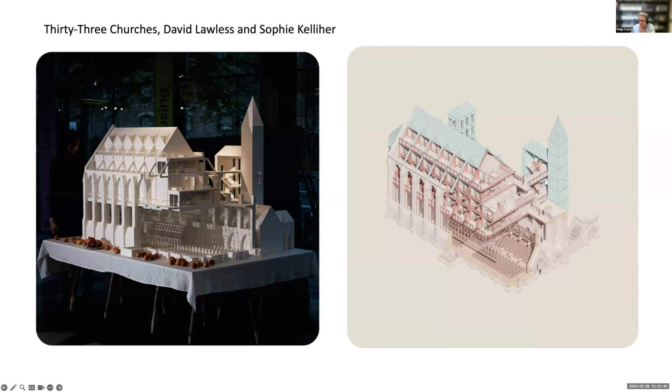And just very quickly, I'm literally scooting through these. This is for people in the audience who didn't get to see the show. 33 Churches by David Lawless and Sophie Kelliher. The name comes from the 33 churches identified in the Archdiocese of Dublin submission to the draft Dublin City Council Development Plan 2022-2028. Their installation really focused on these churches, identifying their potential for rezoning for future residential use, and it was a really provocative, engaging presentation.

Building Society, by Tom Cookson and Sarah Carroll, is very much based around the idea of the unused regional branches, 103 or so regional branches that shut down, and these could, with some physical altering of the space, be turned into places where we could in fact think about them as opportunities for residential use.

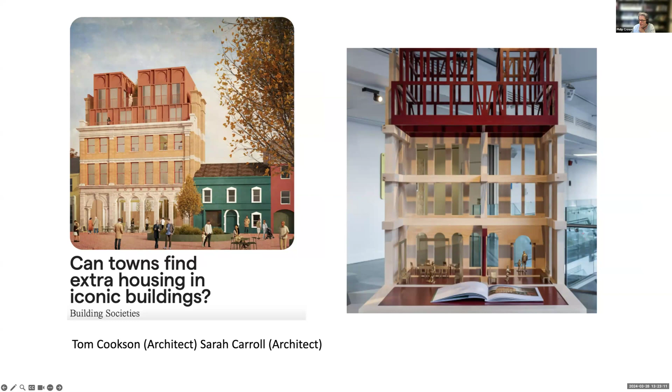But it was very much about delivery, affordability, and placemaking. And their installation was this one-to-one construction. They used, I suppose, the actual one-to-one physical space of the residential space and incorporated that into their exhibition. And they collaborated with Fast House Construction and Common Ground Community-led Designing, Lagan Homes, etc. And they were showing that this is really possible to work in this way.

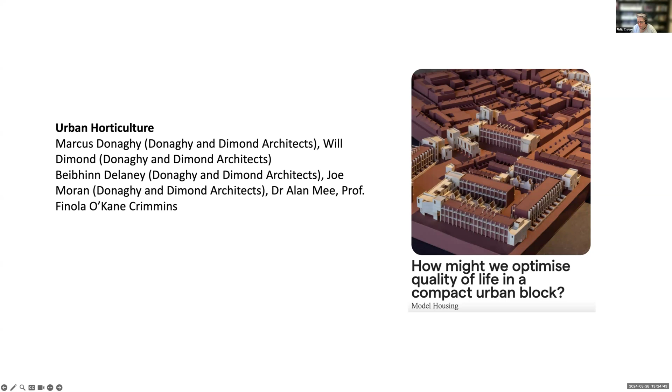The model housing that a team from UCD pulled together, Elith, Marcus and Will and Beibhinn and Joe and Alan and Finola all came together, and they focused this very much on the Liberties, but this actually could be scaled. This actually is the feel, or the sort of thought process and the objectives behind this project, which could easily be applied in any urban setting, either in a town or suburban city edge, and they demonstrate how new opportunities may be found for habitation and rich living environments within the urban grain of Irish towns and cities. And it's just a great project and a great resource for people who are thinking this way.

And then you have what McCullough Mulvin did. I mean, they gave us a hundred ideas, which was wonderful. And in a sense, a lot of the conversations we had around these spaces were with people who work in policy, with people who work in the Department of Housing, and by presenting something as these small bite-size changes, and these ideas, it makes it possible to believe that these can happen. And this particular piece was a never-ending conversation starter and sort of mindset changer, because of the way McCullough Mulvin achieved the subject matter and the presentation.

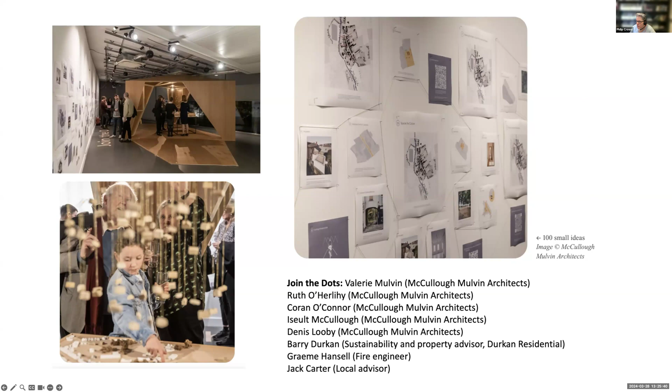And then, Start Spreading the Mews. Stephen, you're very familiar with this project. Again, this was a wonderful installation, really looking at unlocking the potential of suburban laneways, but in a way that was streamlining the process, creating new residential units. And it was just a really, really great project in collaboration between you and Stephen Foley. People still talk about it today, actually, even when I'm in studio here in UCD.

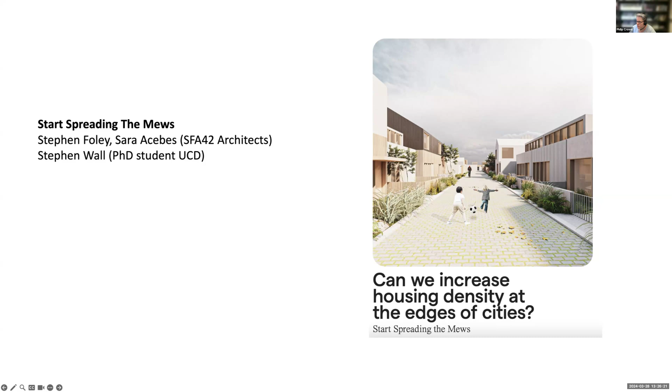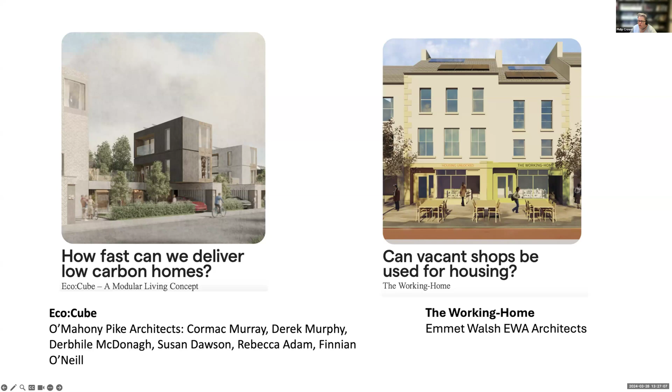And then I'm not going to talk about these because the guys are up next to talk about these, but I'll just move swiftly on again, looking at new ways of thinking about modular living, with the OMP piece, and alternative housing models, looking at issues of density and supply, in that presentation of how fast can we deliver low carbon homes. Even that question is quite provocative. All these questions, can vacant shops be used for housing, what Emmet did? People go, no, you live above the shop, don't you? Why would you want to live in the shop? These were the conversation starters that I heard as I walked through the Science Gallery.

And then, you can see from the amount of logos here that there was a full ecology of support needed to get this project, with our main partners, the Housing Agency, but we also had support from the Department of Housing. We had support from the LDA, the New European Bauhaus, backing from Trinity College Dublin. I mean, to think about the provost who gave us that space, I can't imagine. God, we were so lucky and opportunistic. Actually, if this had gone in any other space in Dublin, I don't think we would have had that feeling of being radically public, which is something that I love to think that this show was.

So, you know, Housing Unlocked was not merely an exhibition, I think, but rather an exercise in changing narratives, opening up generous discussions on the future of the built environment and how it should serve people. Housing Unlocked was charged with a sense of urgency. That sense of urgency was running through this whole project like a sort of electricity, but it was very much combined with optimism and innovation, and that was really important, which was reinforced by the confluence of ideas from the architect teams who came together to contribute to the challenge. The impact of Housing Unlocked remains to be seen, and this conversation we're having today is part of that ongoing continuation of the initiative.

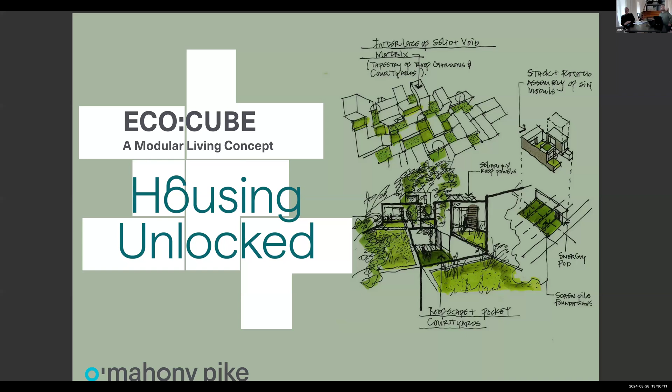Okay, so I don't know if everybody can see this yet, but thanks very much, Stephen, for the invitation to talk at today's event, and also we're delighted to contribute to the ongoing research and presentations that the Centre for Irish Towns are doing. And also, Nathalie, we have to extend our thanks to you as well for bringing us all together on this journey. And it's actually really nice to reflect on it now that the dust has settled a bit.

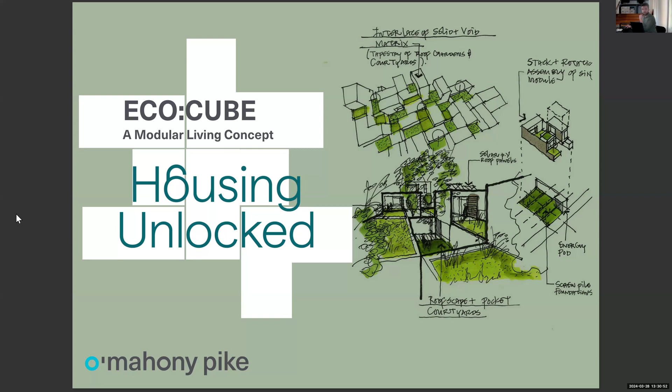And certainly we are finding that it really only was the beginning, in terms of conversations that have been happening. And I know from speaking to other exhibitors, it's the same. Each project, each exhibit, if you like, has taken on its own life since the exhibition, which really was the aim. It's very reassuring to see that happen. So I'll just try.

Yeah. So just to introduce the team, I'm joined here actually by Derek Murphy, director at O'Mahony Pike Architects, who has quite a busy schedule. So it's great that he can contribute to the talk today. But we also had a varied team within O'Mahony Pike at director level, associate director, associate, and architecture level, which really meant that we brought a multitude of perspectives to the project, I suppose.

And also experience all across the housing market, whether it's in our Dublin office or in our Cork office, and experience, I suppose, at the concept stage, which is predominantly the area I would work in, but then also at the delivery end of things and actually constructability and those conversations that we're having with builders on sites and developers, etc.

And then we also collaborated with KSN, who provided quantity surveying input onto the proposal, because I suppose we were keen that this is a real proposal that actually was tested, if you like, to a degree. And then O'Connor, Sutton Cronin, OCSC provided mechanical, electrical and structural engineers.

And then a special mention as well to presentation models, Katie Galvin, as well as Podium, who constructed our OSB exhibit. They really were fundamental, I suppose, in developing the idea into what became the exhibit, actually something we probably wouldn't have been able to imagine ourselves, and they had quite a lot of input into how we 3D printed a lot of the modules. We'll end on an image of the exhibit for those who haven't seen it.

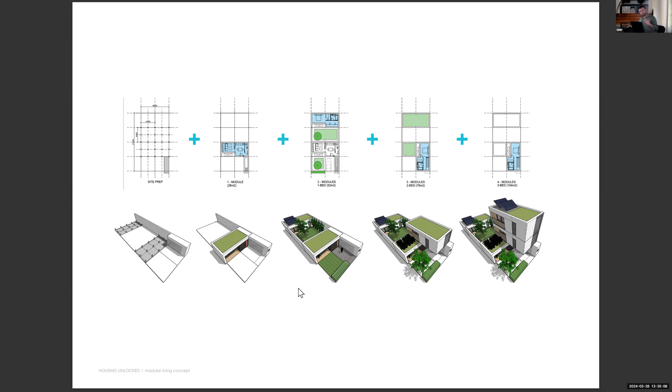I suppose going back to the title of the exhibition, Housing Unlocked, what this was unlocking for us really was that, as opposed to just a traditional housing development, and we'll look at some examples of that, when you start to stack and rotate these modules in these iterations, it meant that we could actually, on a similar plot size, grow up to a 3-bed house, but also that it's offering something unique and different in terms of a house typology that might be new and exciting for people to live in. And also that no two houses would necessarily be the same. So there's quite a lot of flexibility within that.

So when Derek first presented the idea in-house to us, you were talking about a sample site in Coolock, I believe, of 1 hectare. And this is what we're looking at a lot on the urban design level, and people like John O'Mahony have done quite a lot of presentations on as well, which is this typical suburban 1950s to 1980s development of the house with private rear garden in areas like Coolock, Crumlin, Drimnagh, all throughout the outer ring of Dublin City.

And that gives you a typology which is, you arrive at a 4-bed house at a minimum with quite a large back garden, and it's static, and it can only ever be that 1 iteration. So we looked at the typical plot size of 24 meters by 6.5 meters, and the same sort of area, but just slightly more squat, was our test site that we developed this idea on. And I think it's fair to say, Derek, there's quite a few different iterations within this of potential layouts that you can generate.

But particularly for the exhibition, the two that we communicated and developed were either a communal courtyard module, which takes up about half a hectare, or a back-to-back housing module like this. And we'll have 3D views in a few minutes explaining that. But really, it shows that if you purely were interested in the numbers, if there's anyone from a planning background here, what would have been a site taking 36 dwellings per hectare can actually be scaled up to 50 dwellings per hectare, or even 66 dwellings per hectare is possible there.

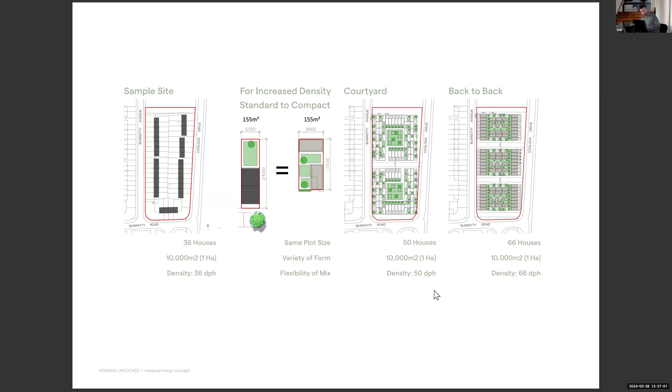And that's what those two modules that we developed look like. So on the left, you can see there's this communal courtyard model, and it's 50 dwellings per hectare. What you're looking at there is about 25 different houses arranged around a communal courtyard. And when we were researching the idea of modular living and the proposal around it, what becomes really important is the placemaking aspect, and really that people can think of this as a temporal or a short-term or a quick solution.

But we're talking about it as actually just a really highly engineered, really well constructed and adaptable idea, but ultimately it won't work unless you have really good placemaking and really good landscaping around it, and really appropriate facilities for people in terms of communal gardens, potentially for community space. It's all just working within the same framework, but we can't, I suppose, just drop this on any one site and expect it to work. The really important aspect is how this is set up on day one to allow it to grow in future.

And then similarly on the back to back version there, I think is that about 25 in each? Yeah, it is. Yeah. I suppose just that, Cormac, on that courtyard model. So the shift in density here, almost doubling in density in the traditional 1950s or 60s kind of format.

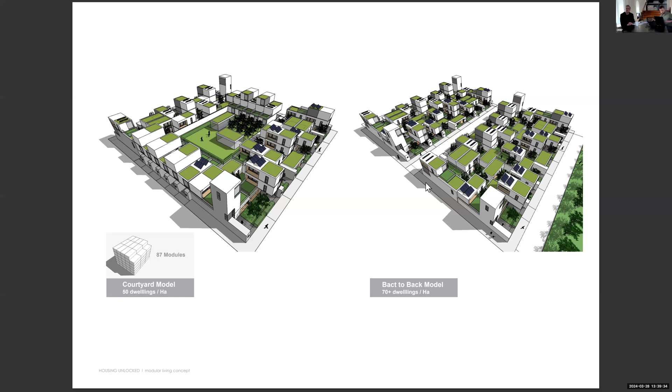So when you have that within the housing models, it means you can also then give back to the neighbourhood or community by having a shared courtyard space, in this case with the one on the left. So these particular houses can access that directly from the rear of their house through either a room or through a wall, and that space then becomes a shared space for the community, while still gaining an increase in supply of housing overall, much more efficient use of land or resource, and more of a sustainable density moving forward.

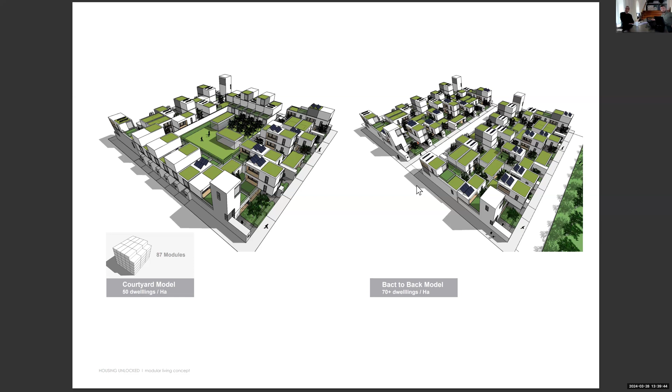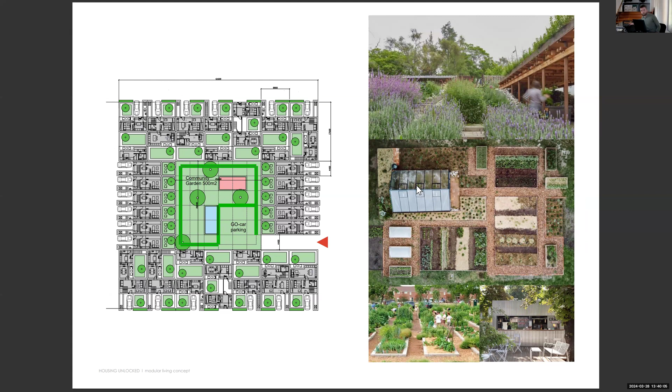Yeah, so I'll keep moving on, but we can always answer any questions to come back, just because we're against time. And so this illustrates that proposal of what is the potential of this communal space, and how we really see that as being a sort of anchor or fundamental piece of the picture, that we're not just talking about square footage of the modules that are brought in, but really, as Derek said, the variety that we can offer in terms of outdoor space and communal space.

And as we developed this for the exhibition, we started to kind of play with these modules, the idea being that we would work out a series of typical house types, and then actually 3D print a number of them, and allow people to interact with the exhibition, rather than it being a sort of lecture, just purely communicating, but more of an engagement with people who interact with it.

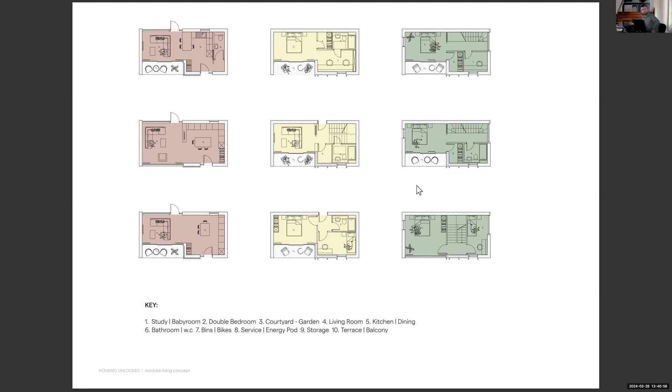So the color coding system that's there really just reflects, on the left, the red kind of represents a living unit, the yellow is a flexible one, and the green is one that's for sleeping, and you kind of get into what each one does. And I suppose also we have a lot of experience on apartments and houses, so we had to make sure that these actually would be spaces that were livable as well, responding to housing standards.

So these were the 4 options we selected that people could play with. Nathalie mentioned the play area of the exhibition. Yeah. So we had a giant Lego set, I'm sure Cormac will touch on, where these 3D printed modules were done, and actually one of my joyful moments was seeing a bunch of kids, left by their parents, and this was like a guidebook we gave them to spark their creativity to start off with a number of combinations, but then they came up with their own, and all sorts of crazy stuff was happening.

But in total, we worked out there were 15 different typologies of housing plausible in this, and as I say, people think about modular as not giving choice. And we didn't want a sense of one size fits all.

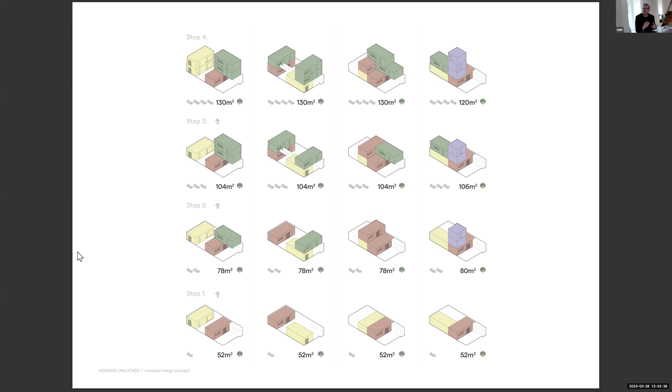So a big part of this is giving choice to people in the way they can assemble their homes, and that could then also animate the street and the overall neighbourhood development. And again, as Cormac says, it can change over time as people add or take away modules.

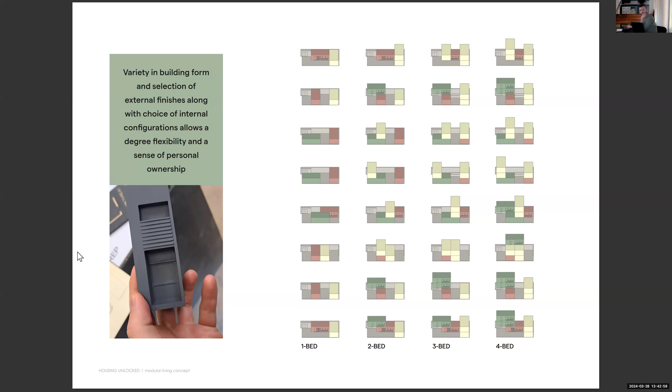Yeah. And then this is kind of just an image of when Derek says 15 typologies, and each one of those typologies could be 4 different levels of houses. So I think when I counted, I got 59 that we did for the exhibition. And there was a point where we had to restrain ourselves from designing any more, because, you know, it was kind of like a Rubik's Cube, a bit of a challenge of trying to figure out what were the potential. We picked the 15 best, I think, that we found had the most interesting qualities.

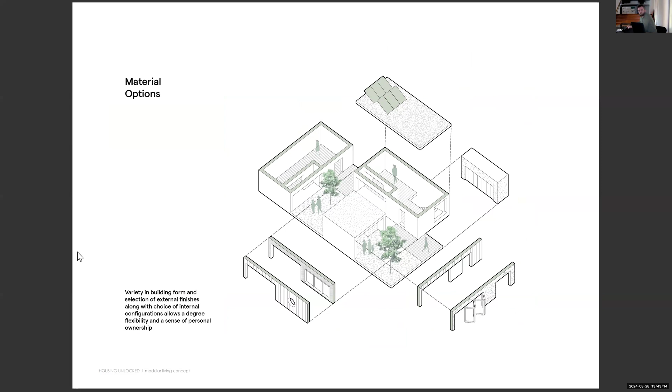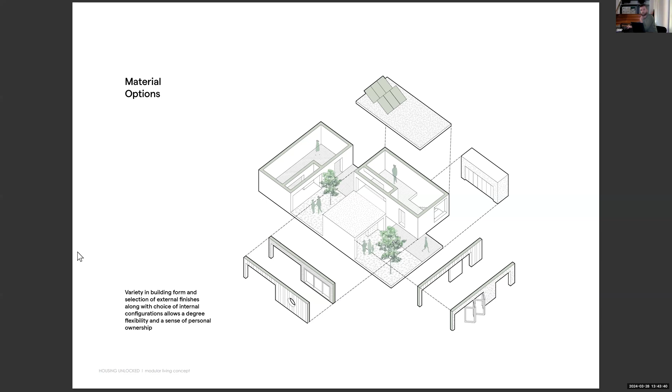And then I suppose, yeah, look, we're thinking of this from the homeowner side, the client side, if you like, and really one of the key recommendations we got out of it was that there would be this framework in place, and then there'd be design guidance around how they might actually be adapted. And really what we're always trying to do is give people choice. So ultimately, one module doesn't have to look the exact same as another, even though it's sized in the same way. So there's a variety of finishes and materials possible within this structure.

And just some images then of a version of how we see it. And I suppose, trying to expand from that idea of prefabrication as being something quite monotonous and banal, we're trying to explore here and really demonstrate the sort of streetscape that's possible, and even the effect of having that one constant element, which is, I'm not sure if people can see my cursor, the energy pod that's there. It does actually add to this regularity of streetscape, and then all these other things are happening beyond that, and they'll change over time. People could also scale down with module trading as well as scale up, which is important to say.

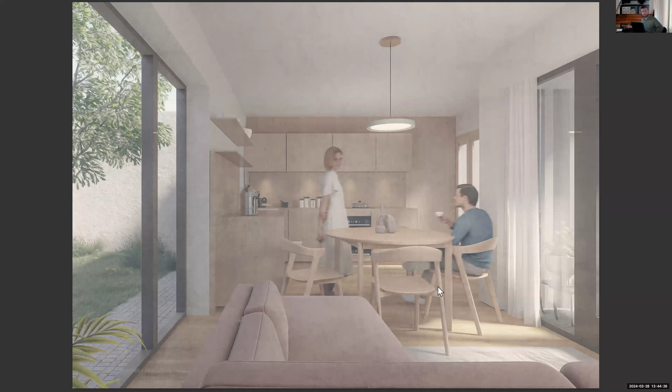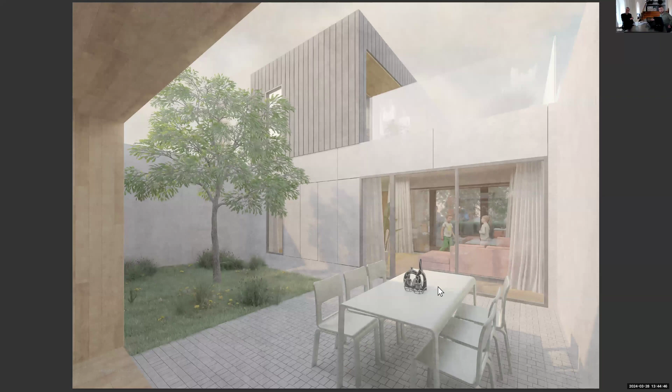And looking at then finishes of the inside, and again, in every image you're getting dual aspect, and you're also getting quite close to external spaces. This is something people really value now, particularly with the move to working from home. You want to have access to your own garden, and you'll have it across multiple levels within this, and then potential for some of the external spaces there. These are some of the upper level spaces that we looked at as well.

And just to say, in the upper levels, as you start to redistribute traditional gardens vertically between courtyards and roof terraces, we often thought about how you'll always communicate across the fence in the front of your house with your neighbour, and talk as you're putting out the bins. We felt there could be another layer of communication at the back of these developments, at the upper levels between terraces and roof gardens, where neighbours can talk down or across to people.

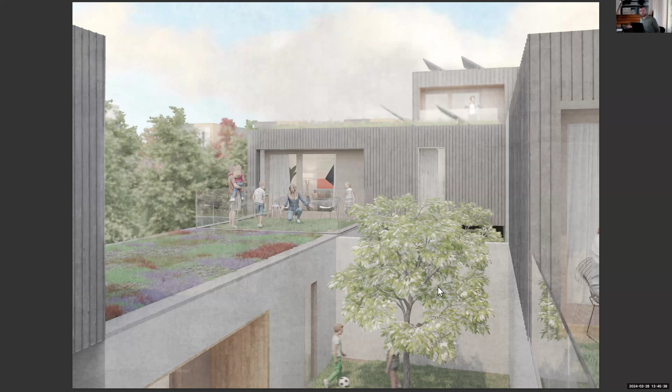So it's about animating that sequence of tight-knit spaces internally as well, and vertically, and how they interact with each other. Yeah, I mean, you'd see that in historic courtyards and apartment buildings in Paris. So it's something that exists, it's a typology that's quite successful and fosters a sense of community. So we're trying to figure out a model for that. And yeah, we're just coming to the end now. This is a very condensed version, I suppose, of what we have.

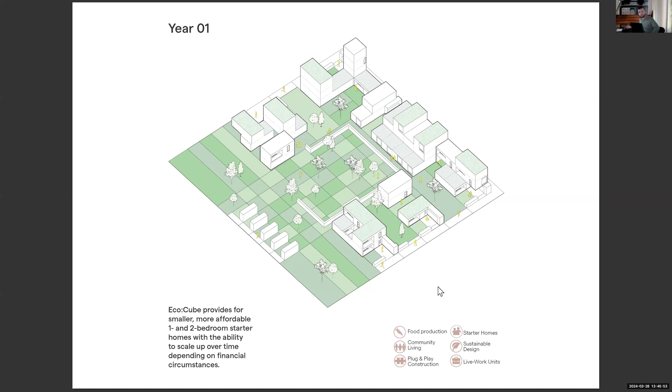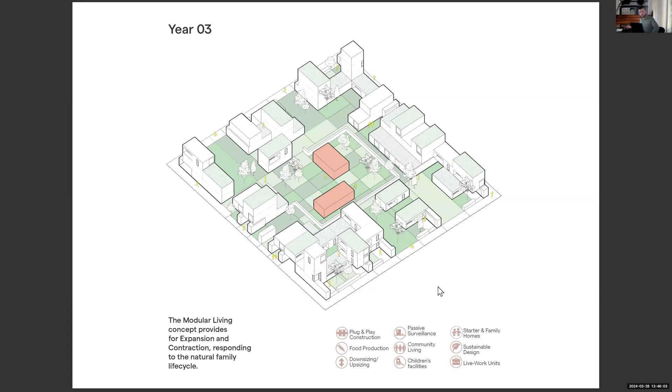But really this idea that in year one, it might begin with one of those common courtyards looking like this. And over time, more people start to buy in, and you're building, and these are growing, more facilities get added. And again, I like the word ecosystem, because it can contract and expand as well, rather than just be a static thing that grows over time.

And then, of course, we did look at the sustainability of the deliverable. We wanted to be as low carbon as possible, and obviously one of the huge aspects that the modular system offered us was that we could actually get these highly engineered, highly performing, and they're also demountable, so they can adapt to future conditions as well.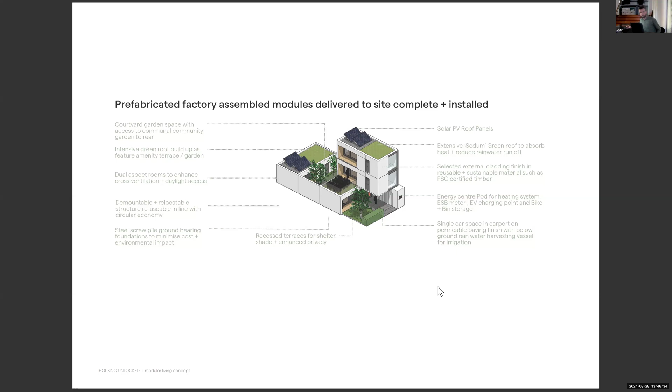And we won't get into the brass tacks here, but I suppose there was KSN's kind of input as well. What we're finding there is the more homes that were delivered, so if you go from 30 to 50 or to 70, you can get up to 10% of cost saving. And then, with the constructability of it and the program aspect, not only are you saving on time, but it's also a much safer working environment as well.

And the RIAI is doing research on modular construction as well, and they're finding this. A lot of components in the industry, from what I understand, are actually moving in this way as well, because you can guarantee precision and accuracy. So we want, as architects, to take ownership of that process and actually say, well, how do we allow design to be factored in there as opposed to just efficiency.

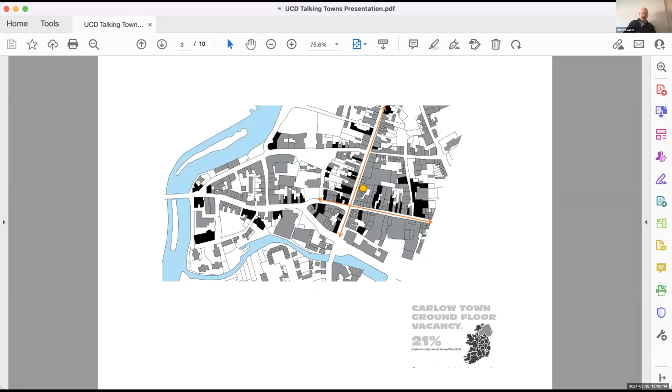So you can see even at 20%, which is high, but not as high as some other towns, which are nearer 50%, it is quite a big problem in town centres. And you can see that reflected on the street and the urban situation. So I suppose we looked at one building on Dublin Street. We were introduced to the County Council down in Carlow, and this was a vision of what our aspiration for town centres should really be.

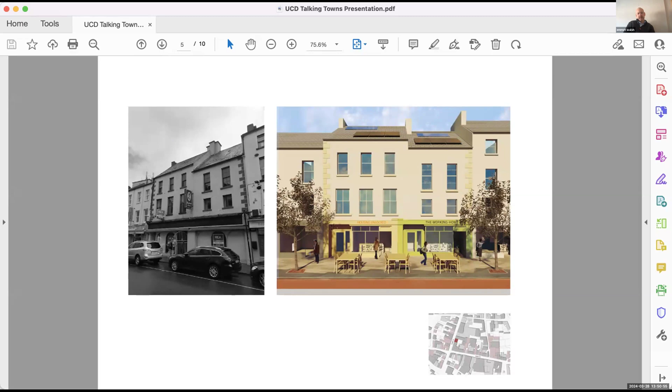It should be wider footpaths. It should be public seating, landscaping. It should be the removal of car parking spaces, opening up bike lanes, and independent retail, which is a key component of our Working Home proposal. So essentially the Working Home is a simple idea. It was based on the benefits of reclaiming the ground floor space in some of these commercial spaces.

So there's a lot of different issues that we have when we try and look at some of these buildings, but by reclaiming the ground floor space, we can actually help unlock and develop projects that are more viable, that potentially have more family-friendly accommodation, more wheelchair-friendly accommodation, and have less compliance issues around fire safety, because you're not compartmentalizing between commercial and residential.

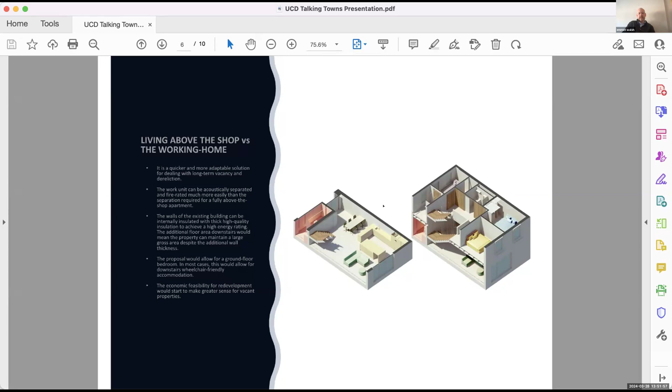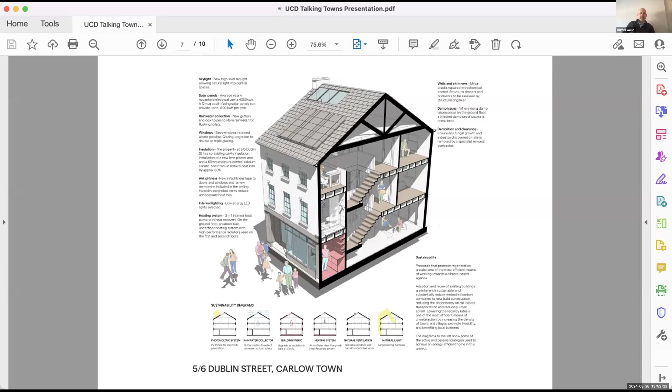So the Working Home essentially takes a small studio type space and puts it at the front of the street and maintains the active street frontage, but then reclaims a lot of the building back as a home. So this drawing was really just looking at all of the interventions you might need to make to bring a building like that back into use, and looking at the relationship between what would be this commercial space on the ground floor and the huge potential that would be there if you reclaim the ground floor space as residential, and the possibilities to really open up the building.

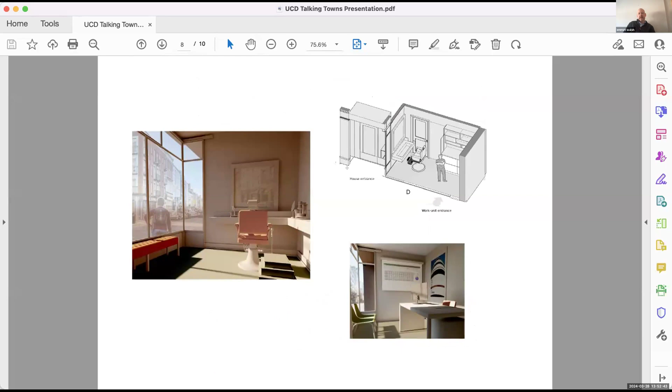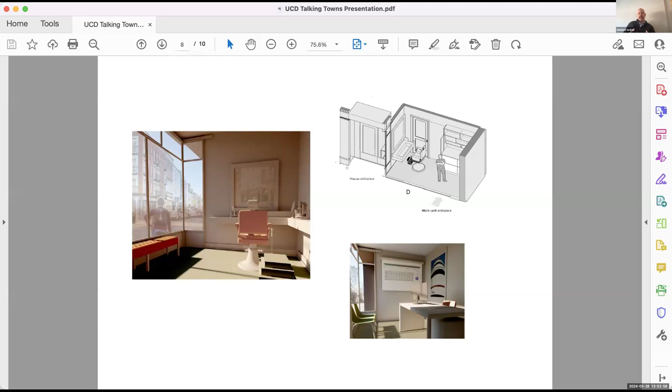As you're looking at the front, that's the commercial space, which is really about 2.7 meters by about 4 meters, which doesn't seem like a lot, but for smaller independent retail, it could be something that's quite useful. And you're suggesting that you're trying to take the people who may be working at home already, working hybrid, who might be in garden sheds or attic spaces, and bringing them onto the street, using that as a way of activating the street frontage.

So it was really just looking at the potential of some of these buildings. A lot of them do have structural issues. They do have a lot of problems with dealing with older buildings. But as you go up into these buildings, there's amazing rooms, there's great spaces, and huge potential for accommodation that's based within the town centres.

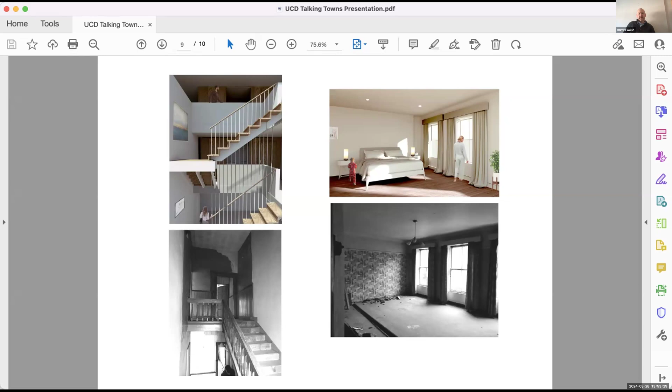Another initiative that the housing agency submitted was a potential amendment to the national planning framework. So there was a submission to the planning advisory forum of this working home model as a different designation, so that it's not just residential or commercial; there might be a working home designation, and there might be certain benefits within that working home designation.

I suppose the big change since the exhibition has taken place is really the Croí grants. So when we did the proposal at the start of 2021, the grants weren't in place, but we're certainly finding a lot more interest in taking on some of these kinds of buildings, and a lot more initiative. There's been over 2,000 approved applications through the grant scheme. So positive news, and definitely a change there, that there's more of an interest in doing something about the issue of vacancy in towns.